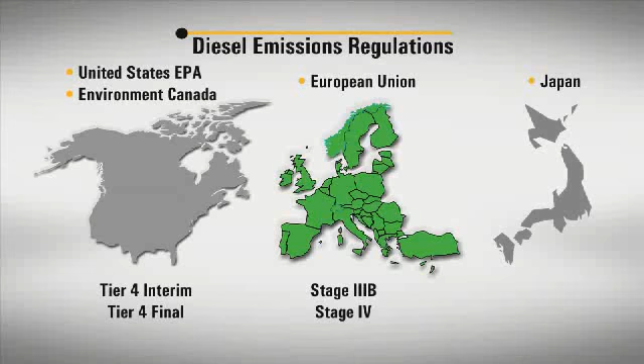Non-road diesel-powered heavy equipment must meet new emissions regulations being phased in beginning in 2011. These regulations are referred to as Tier 4 Interim in the US and Canada, Stage 3B in the European Union, and Step 4 in Japan.

Caterpillar developed ACERT technology to meet current and future emissions regulations. ACERT improves combustion efficiency and reduces emissions. Aftertreatment, first used with on-highway trucks, was added specifically to help meet these emissions regulations for non-road machines.

One of the key emissions being removed using aftertreatment is particulate matter. The 2 primary particulates are soot and ash. Soot is made up of unburned diesel fuel and engine oil. Ash is residue from a variety of engine oil additives that didn't burn.

Periodically, the soot must be removed using a process called regeneration. Machines using the CAT C7.1 ACERT to C18 ACERT engines have a serviceable canister containing 2 aftertreatment devices, a diesel oxidation catalyst, or DOC, and a diesel particulate filter, or DPF.

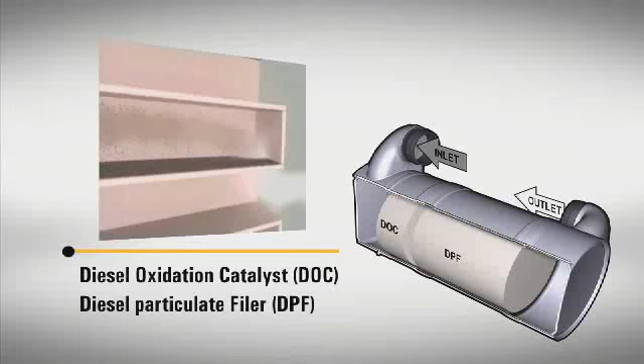As exhaust streams through the canister, the diesel particulate filter fills with soot deposits and needs periodic regeneration to remove the soot and maintain filtering efficiency. Ash that accumulates in the filter is removed every 5,000 hours using a special service procedure that requires the filter to be removed from the canister.

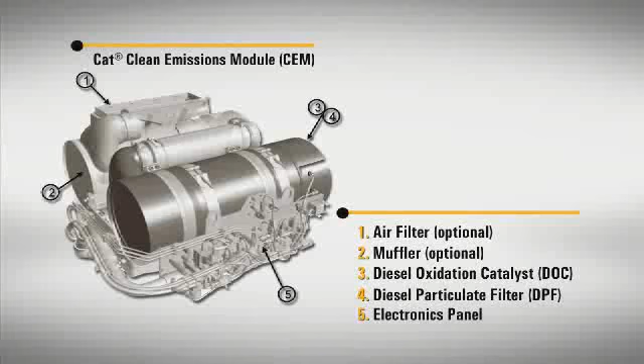The CAT Clean Emissions Module, or CEM, contains the aftertreatment canister and a combination of other components from the list shown depending on the machine model. In many machine applications, the CEM mounts directly over the engine.

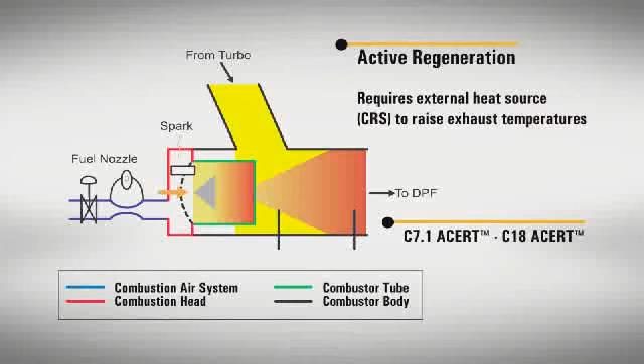Active or high-temperature regeneration, used on the CAT C7.1 ACERT to the C18 ACERT engines, requires a supplemental heat source for regeneration. The CAT Regeneration System, or CRS, fits ahead of the DPF canister on the Clean Emissions Module.

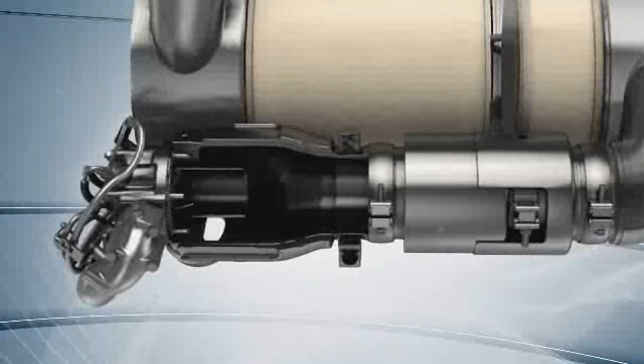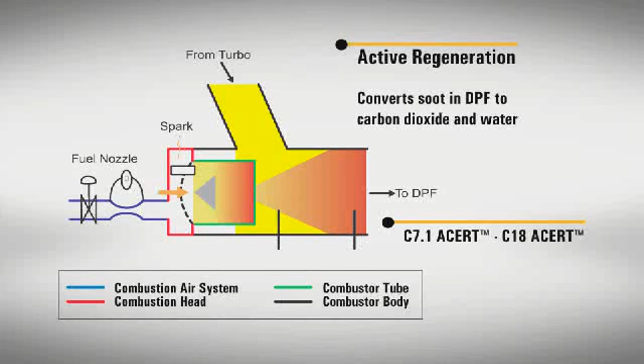This device has its own source of combustion air from the turbocharger, diesel fuel from the machine's fuel tank, and spark ignition. During regeneration, exhaust flowing through the CRS is heated, which oxidizes the soot in the diesel particulate filter and converts it into carbon dioxide and water.

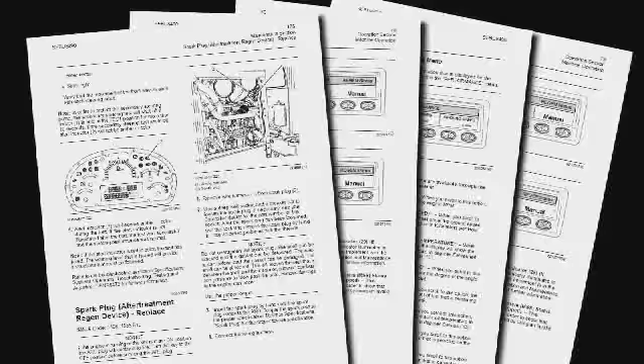While operating in automatic regen mode, there is no operator action required to initiate a regeneration cycle. Be sure to check your machine's operation and maintenance manual for the inspection points on the Clean Emissions Module. During your walk-around inspection, the various fittings, connectors, and clamps need to be inspected.

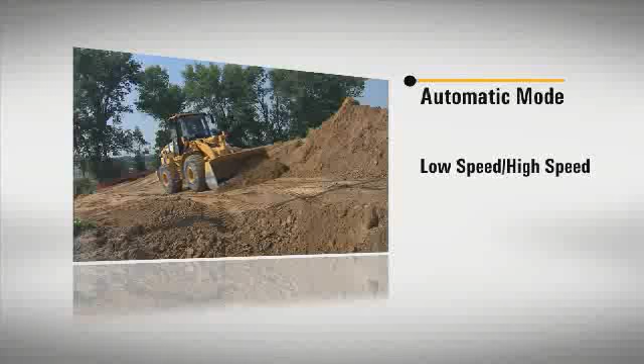There are 3 regeneration settings: automatic, manual, and disable. Automatic mode has 2 programmable options that enable the engine ECM to initiate regeneration. At the low-speed, high-speed setting, low-speed regen occurs when the soot level in the diesel particulate filter is 30% or greater and the machine meets certain conditions near low idle.

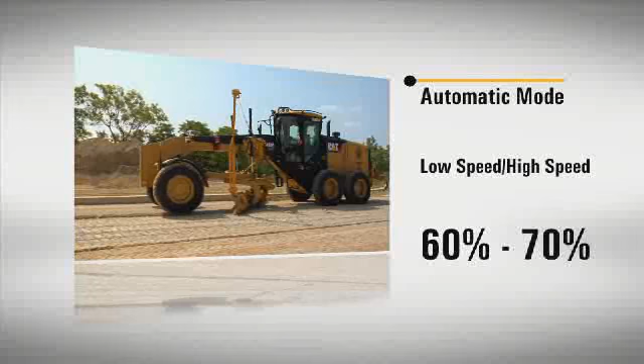Should the soot level reach 60 to 70%, high-speed regeneration occurs while the machine works. If preferred, the ECM program can be changed to low speed only to provide regeneration while at idle and disable the high-speed option. The advantage is that low-speed regen uses less fuel than high-speed regen.

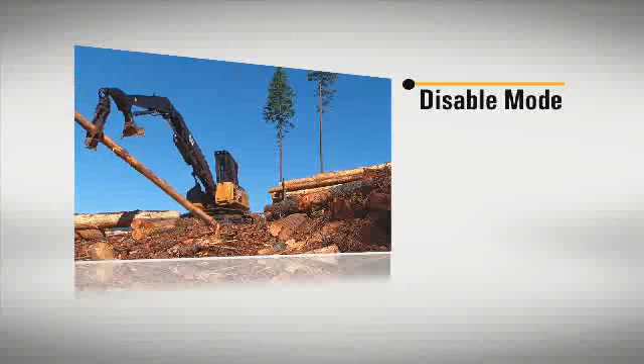Manual mode enables the operator to override auto mode and initiate regeneration using the manual regeneration switch in the cab. This can happen as early as a 15% soot level is reached. Disable mode enables the operator to prevent regeneration from occurring while working around combustible materials or airborne dangers such as gases or dust. However, soot continues to accumulate.

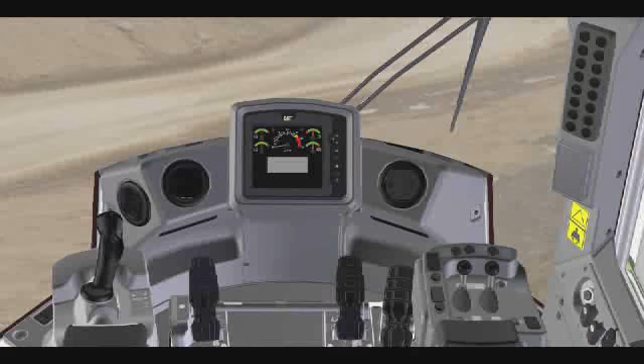Tier 4 Interim Stage 3B machine operators must be able to recognize the various regeneration alert indicators and understand the switches that have been added inside the operator's compartment. These include the soot gauge, alert indicators, action lamp, and multi-level warning system.

The soot gauge is a bar graph that slowly moves from left to right, from 0 to 100% as the DPF fills with soot. After regeneration, the soot gauge will reset to 0.

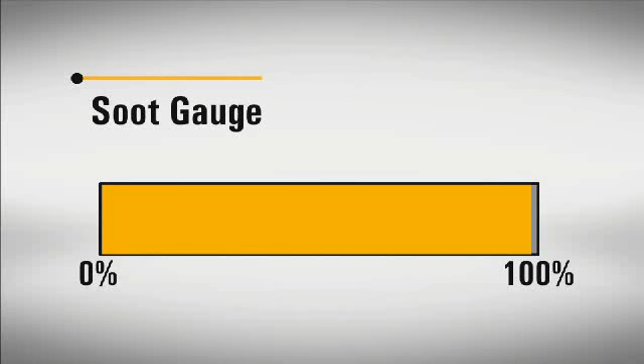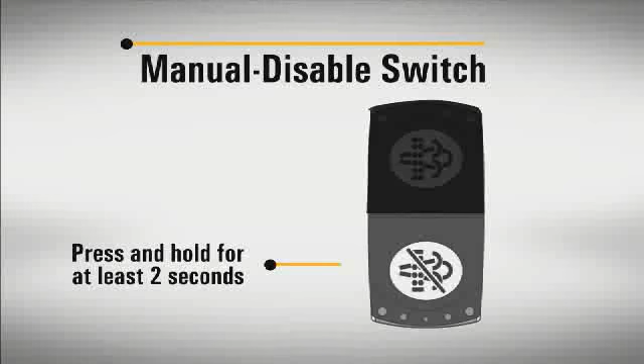The manual disable switch is located in the cab and has two different designs based on machine model. One is a spring-loaded rocker switch that controls two different features. Press and hold the top half of the switch for at least 2 seconds to manually initiate a regeneration cycle. Press and hold the bottom half of the switch for at least 2 seconds to disable regeneration. If neither function is activated, the system remains in automatic mode while the switch is in the center neutral position.

The alternate switch design separates the two functions into individual buttons that also must be depressed for 2 seconds. The disable feature is important if the machine might be temporarily working around flammable materials, gases, dust, or similar applications. In these situations, automatic mode should be disabled. Machines that constantly work in these conditions will normally have the automatic mode feature disabled in the ECM or machine software.

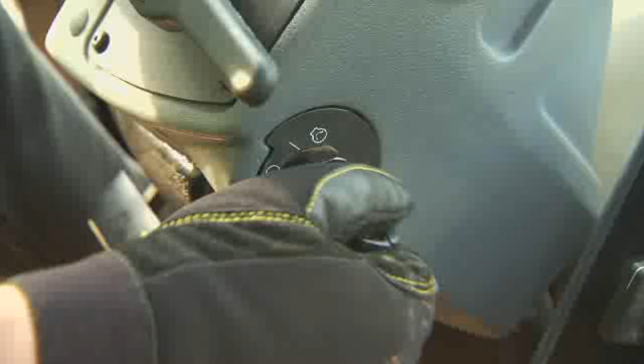Whenever a machine's key switch is turned off, the system defaults back to automatic mode. If you had regen disabled, you'll need to press the switch again when you restart the machine.

The DPF lamp illuminates when the soot level reaches 90% and above. It alerts the operator that regeneration is required.

The regeneration disable lamp illuminates any time regeneration has been disabled. Regeneration can be disabled by an operator using the manual disable switch in the cab, or by a service technician changing the engine ECM software with CAT-ET.

The regen active lamp illuminates any time regeneration is taking place. The lamp is activated as soon as regeneration begins and goes out as soon as regeneration ends. Keep in mind that when the lamp is illuminated during regeneration, the exhaust temperature is higher than normal.

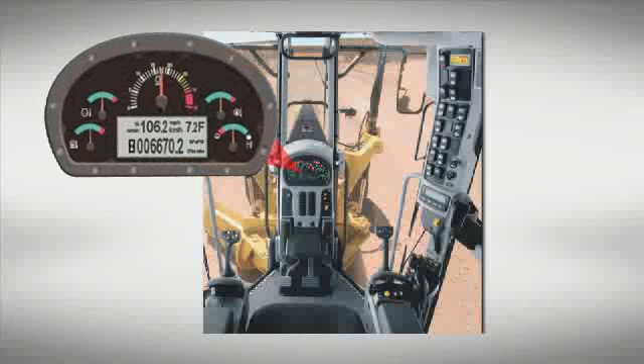This visual identifies the various components inside the cab of a CAT M-Series motor grader. The operator interface consists of the gauge cluster, the CAT messenger display with the DPF soot gauge appearing on the left and the regen status appearing on the right. The display we see shows that regen is in auto mode.

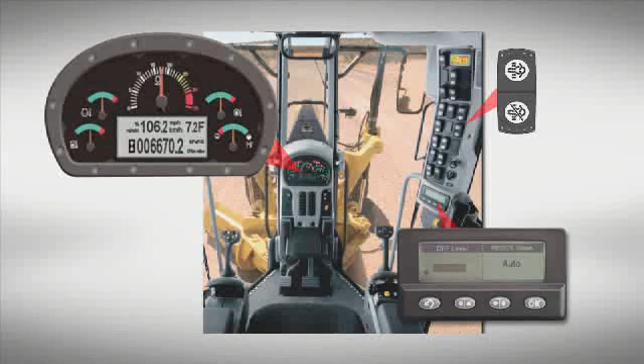The manual disable regeneration switch is found on the switch panel located on the right-hand cab post. On the front panel below the instrument cluster are the DPF lamp and regen active lamp.

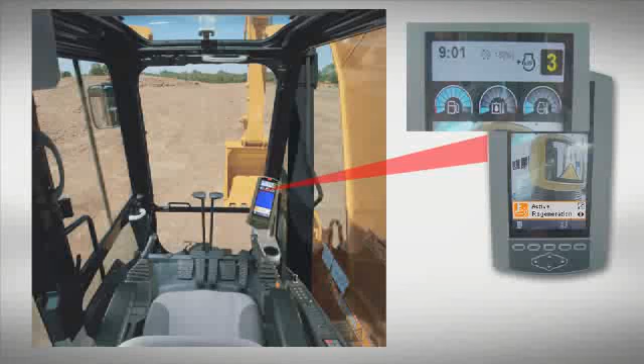The operator interface on CAT hydraulic excavators consists of the liquid crystal display that now includes the various regeneration indicators, such as the regen active lamp, regen disable lamp, and DPF lamp. The DPF soot level appears above the gauges at the top center of the display. On the hydraulic excavator, the bar graph style soot gauge is replaced by a numerical percentage from 0 to 100%.

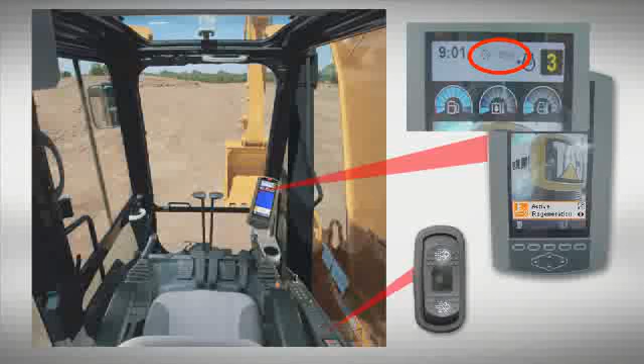The manual disable regeneration rocker switch is located on the right-hand console.

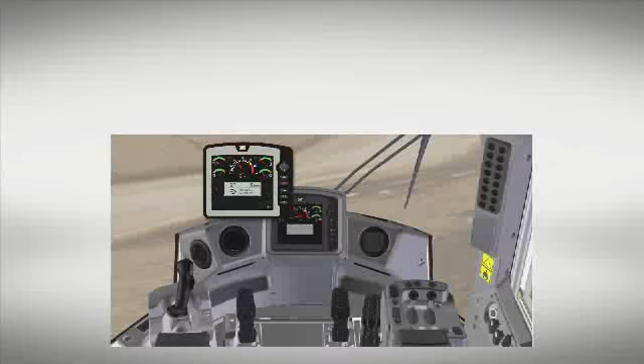The operator interface in the CAT medium wheel loader operator compartment consists of the Generation 3 instrument cluster, shown on the left. Regeneration indicator lamps are located below the gauges. Regen status can be viewed on the LCD screen. The manual regeneration and disable regeneration buttons are found on the panel located on the right-hand post.

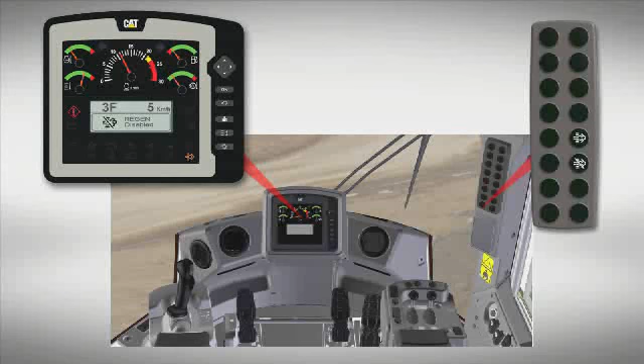In this section, we have 3 different regeneration scenarios using simulated automatic, manual, and disabled modes. All 3 are based on a wheel loader cab mock-up. We'll start by tracing the automatic regeneration sequence.

Regeneration status is first set at the factory. However, it can be changed by a Caterpillar service technician. The operator can also disable regeneration or manually initiate regeneration from the cab.

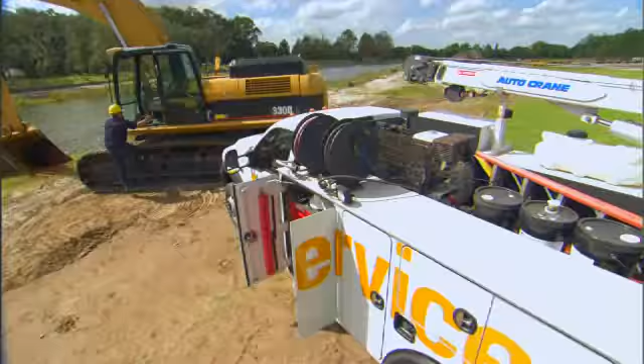While in automatic mode, the engine ECM can initiate regeneration at low speed while the machine is at idle. This occurs anytime the soot level reaches 30% or more and various idle opportunities are met, such as parking brake on, transmission in neutral, and implement down.

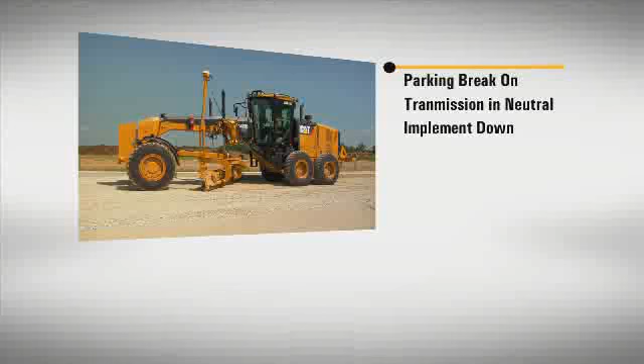When the high-speed setting is enabled, regeneration is initiated while the machine works, as soon as soot levels reach approximately 60 to 70%. The advantages of high-speed regen are that it takes less time and uses less fuel than low-speed regeneration. The maximum number of minutes required by the system for low-speed regeneration is 20 to 25 minutes to clean a full diesel particulate filter.

High-speed regeneration times will vary. In light work applications, however, some machines may not need regeneration for several shifts.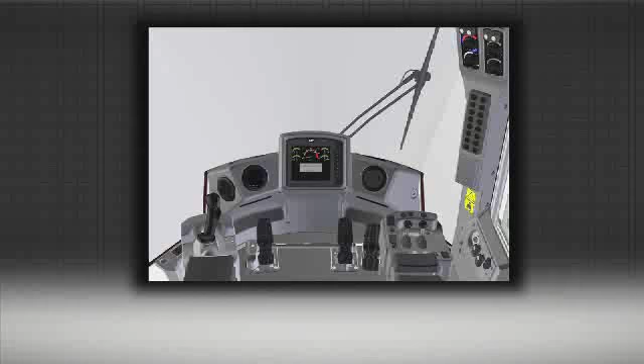This simulation demonstrates how automatic regeneration takes place. In this first screen, we see that the parking brake is engaged and the message display indicates that the regen status is programmed to automatic.

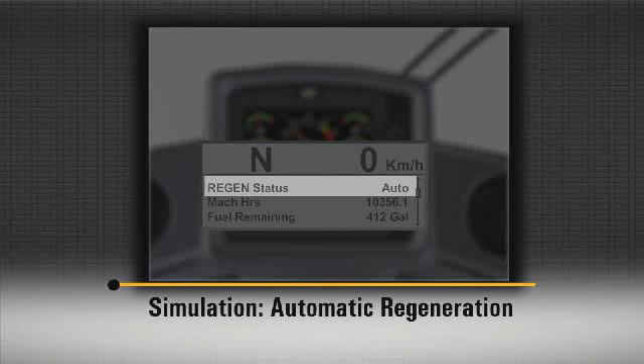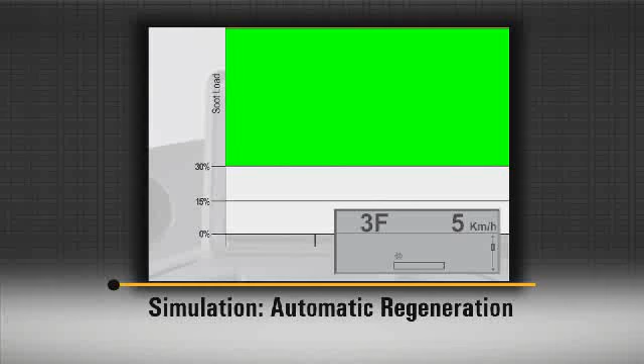Next, the parking brake is released and the RPMs increase. On the display inset, we see that the machine is now operating in third gear forward while traveling at 5 kilometers per hour. The soot gauge and the soot load on the chart track in unison as the soot captured in the DPF rises from 0% to 15%.

When the regeneration status is set to automatic, the engine ECM can command a low-speed regeneration when the DPF soot level reaches 30% or greater, when it determines that the machine is in a non-work condition. If suitable machine conditions are not met, regeneration will not occur, and the soot level will continue to rise.

When the soot level reaches approximately 60 to 70%, if high speed is enabled, the engine ECM will initiate regen while the machine works. The machine continues to work, and the soot level rises to approximately 65%.

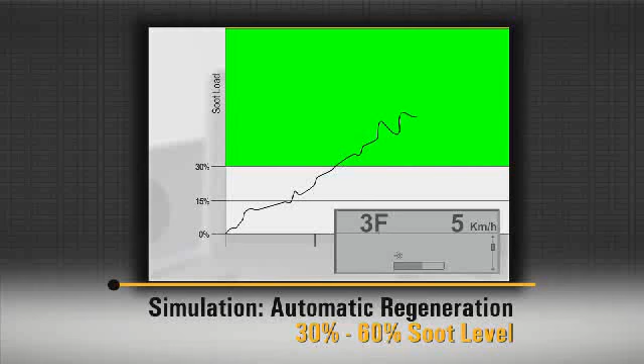The operator idles the machine, and we see the parking brake engaged. The machine is in neutral, and there is 0 ground speed. The ECM, sensing a non-work condition, commands regeneration.

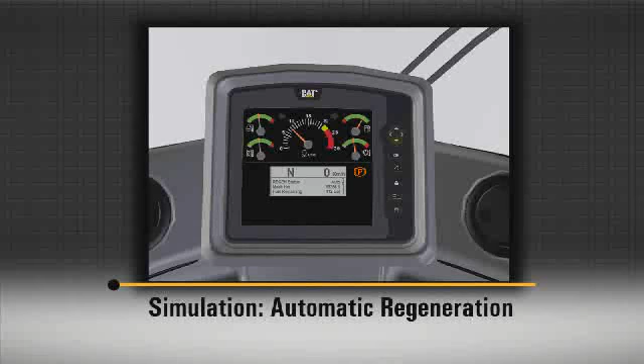Below the display, we see the regen active lamp illuminate. With the machine stopped and in neutral, regeneration continues. The regen active lamp remains on.

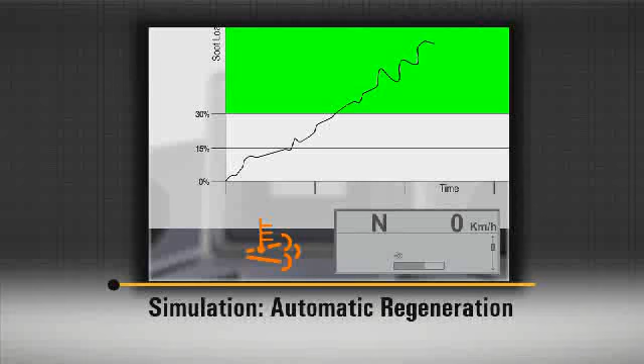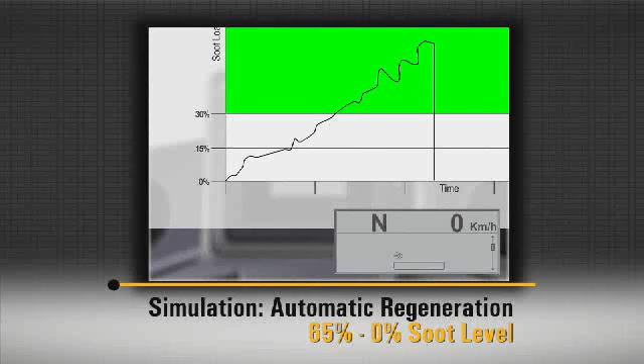The soot gauge and the chart both reset from a 65% soot load to 0% after a complete regeneration. When the regeneration cycle is completed, the regen active lamp turns off. Keep in mind that regeneration raises the temperature of the clean emissions module near the engine.

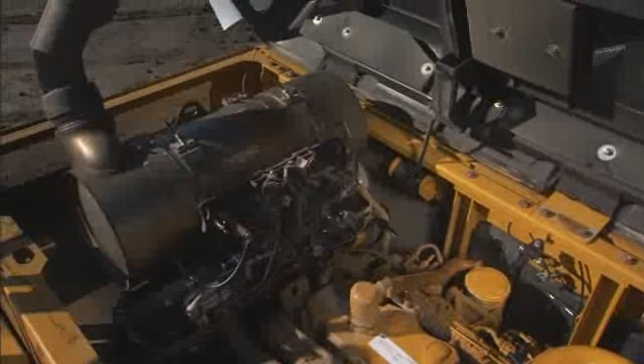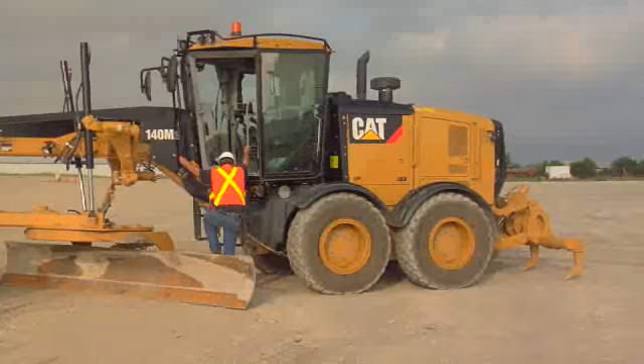If you break for lunch and the ECM initiates regeneration, be careful when you return to work and do your walk-around inspection. When checking fluid levels, there are components in the engine compartment that may still be hot. Also, when regenerating while on break, someone must always stay within 25 feet of a running machine to meet U.S. OSHA worksite regulations.

This simulation demonstrates how manual regeneration occurs. If the machine is set to manual regen, the soot continues to accumulate in the DPF. It's important that the operator monitor the soot gauge and indicator lights. At 30%, the operator has the opportunity to manually command a regeneration, if desired, using the manual regeneration switch in the cab.

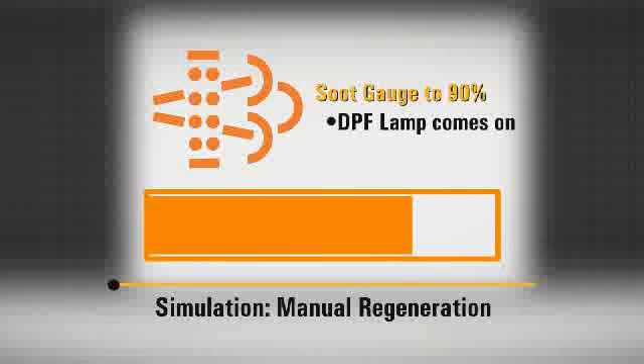We will now discuss what happens when regen doesn't take place and the soot level increases to 90%. At 90%, the DPF lamp illuminates on the dash to inform the operator that it is time for regeneration at the next available opportunity. In this simulation, the regeneration status is set to manual, the parking brake is off, and the machine is once again working.

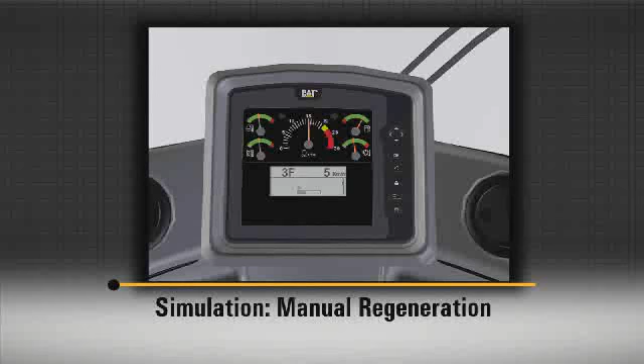In our last simulation, we saw regeneration take place at 65%. In manual mode, the DPF will continue to accumulate soot until the operator presses the manual regeneration switch in the cab. Here, we see that the DPF lamp has illuminated. Again, this tells the operator to regenerate at the next possible opportunity. The operator continues to work.

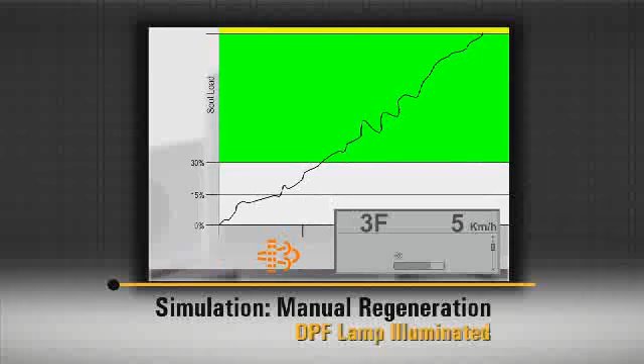The soot continues to increase in the diesel particulate filter, and before it reaches 100%, the operator determines that it is time to regenerate. The operator takes a break and places the machine into a non-work mode. The engine is at idle, the transmission is set to neutral, and the parking brake is engaged. The operator presses the manual regeneration button and holds it for at least 2 seconds.

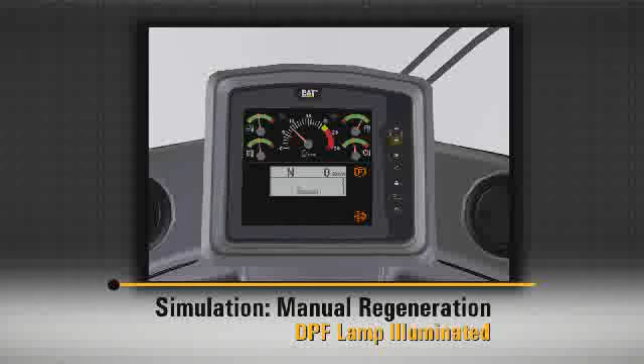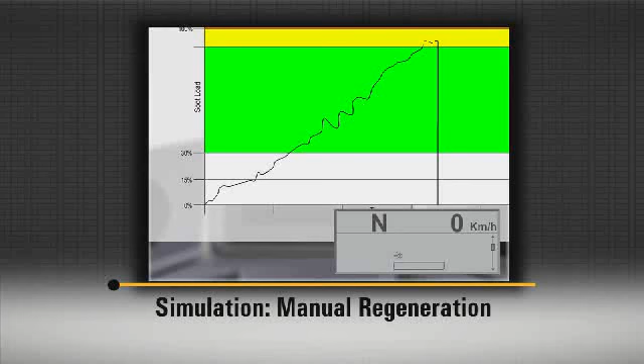When the regeneration cycle begins, the regen active lamp illuminates. The soot level in the DPF eventually returns to 0% after a full regeneration has taken place. Regen can be interrupted at any time if the machine returns to work.

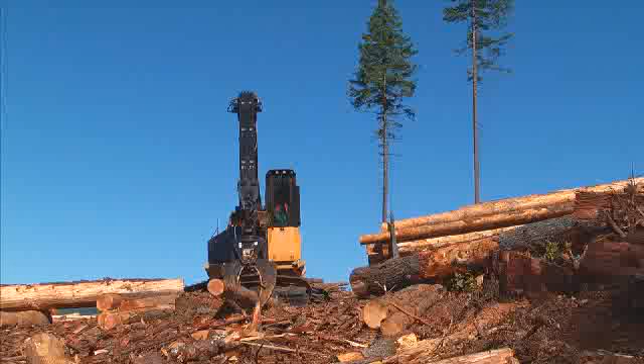Why would we disable regeneration? We disable it if we're working in an application where there is flammable debris such as wood chips or dry forest conditions, or if there are gases, dust, or other risks that we need to avoid. So we disable regen, and when the machine is in a safe stationary setting, we manually initiate a regen cycle.

Similar to manual mode, with regen disabled, the soot continues to accumulate in the diesel particulate filter until we initiate regeneration. As operators, we have to pay attention to our warning signs. Whenever the soot gauge reaches 100%, the red action lamp begins flashing continuously, telling the operator to regenerate immediately.

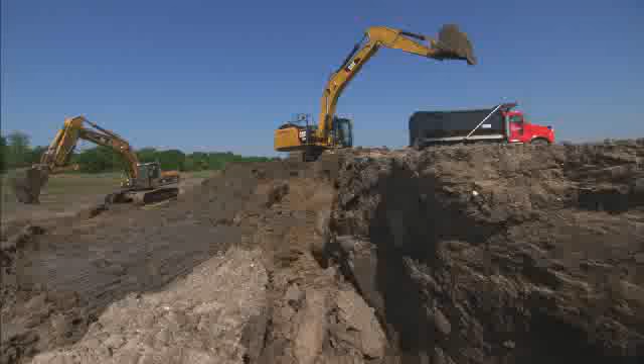There are several possible explanations for a DPF having a soot load of 100% or more. The most common reasons are that the operator didn't create a sufficient non-work window to allow low-speed regeneration to occur automatically, was working the machine too hard to permit high-speed regen to occur, or didn't initiate regeneration while in manual mode. Another possibility is that regeneration has been disabled by a service technician or operator.

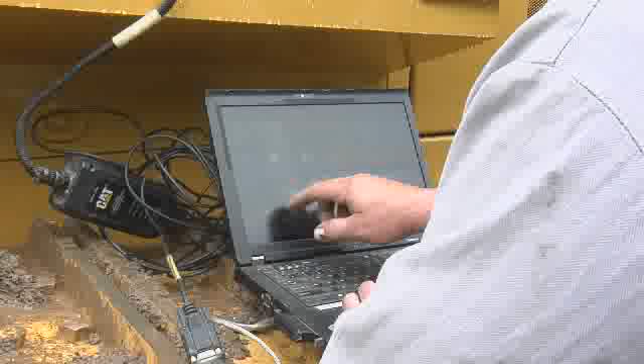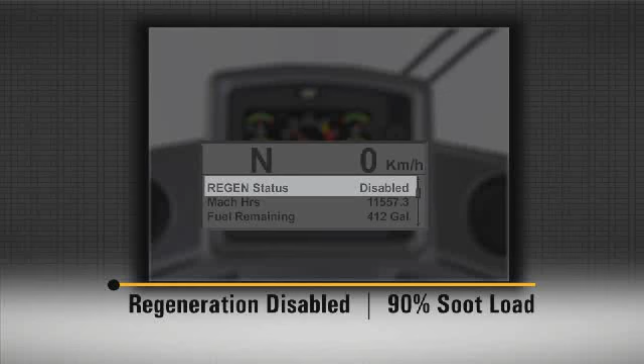Our last simulation demonstrates what can happen when regen is disabled. When regeneration has been disabled by either a CAT service technician or by the operator using the disable switch in the cab, soot continues to accumulate in the DPF. Once again, we are in third speed forward, traveling at 5 kilometers per hour.

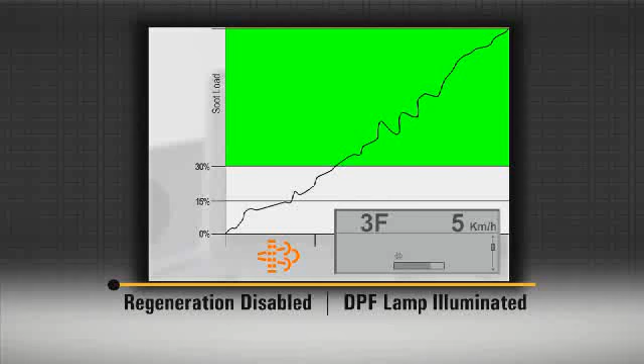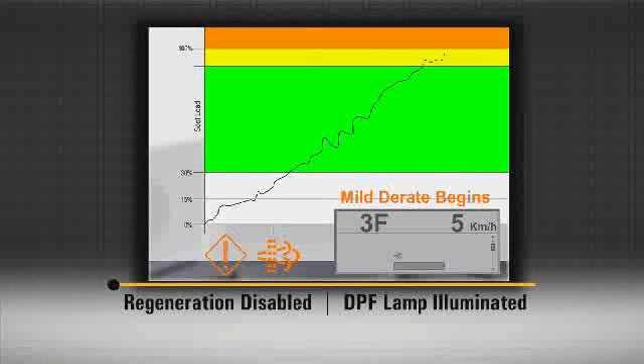Here, the DPF lamp has illuminated just like it did in our manual example. In disable mode, the various warning indicators continue to be prompted as they would if the regeneration status was set to automatic or manual. Look at our soot gauge. When the bar is completely filled to the far right, it's at 100% soot level.

At 100%, the action lamp begins to flash continuously. The engine also begins a mild derate. The useful range of the DPF is from 0% to 100%. However, with the soot gauge at its maximum level, the soot level does go higher, and the warnings become more aggressive.

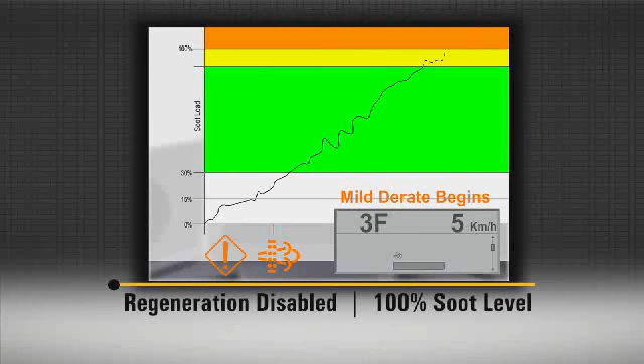When the soot level in the diesel particulate filter reaches 116%, the audible alarm sounds in the cab. The DPF lamp remains on, and the action lamp continues to flash.

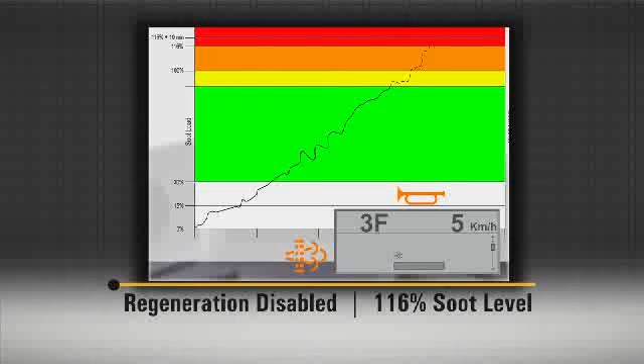The engine derate progressively increases as the percentage of soot increases in the DPF. If you continue to operate the machine for another 5 minutes after reaching the 116% soot level, the engine ECM forces the engine to idle down. The warning lamps and audible alarm continue. The operator can turn the key off and restart the engine to clear the idle down limitation.

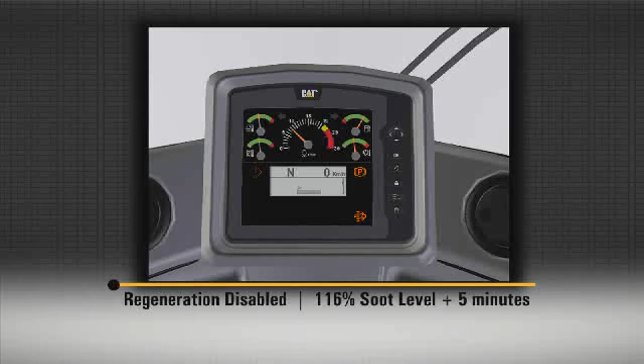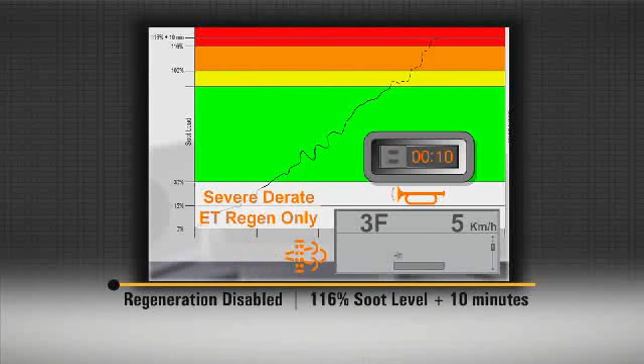At this advanced stage of soot accumulation in the diesel particulate filter, the operator should regenerate the DPF immediately. Should the operator continue to ignore the warnings and permit the soot level to reach 116% plus 10 minutes, a severe engine derate begins. The audible alarm and warning lamps continue. Most important, when this 116% soot level and 10 additional minutes of operation have been reached, the machine goes into lockout mode. The operator is no longer able to initiate a manual regeneration or allow the engine ECM to initiate an automatic regeneration.

Once the machine reaches lockout mode at 10 minutes of operation after reaching 116% soot level, a service technician must be called to perform regeneration using the CAT Electronic Technician Service Tool. We're talking loss of production plus a service call, which is added cost and time. An operator should never let a machine get to this condition. But, as you will see shortly, it really can get worse.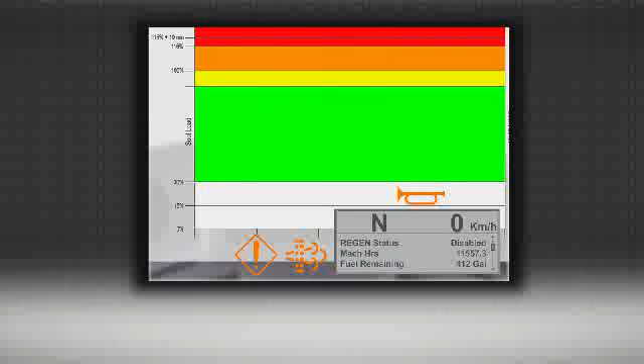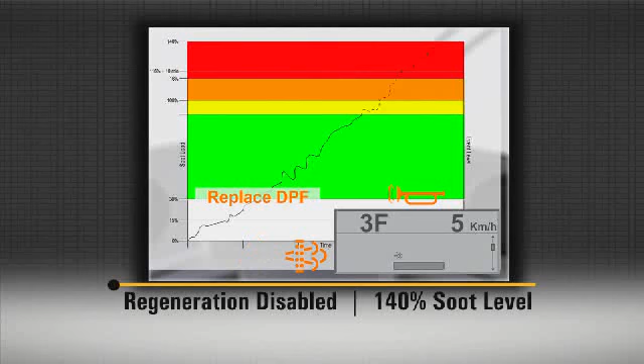Total soot saturation of the diesel particulate filter occurs at 140%. At this stage, the diesel particulate filter can no longer be regenerated and must be replaced. Performance is also greatly curtailed, and it may take extra effort just to move the machine to a suitable spot for servicing. At 140%, the engine ECM will first force the engine to operate at low idle, followed by immediately commanding the engine to shut down.

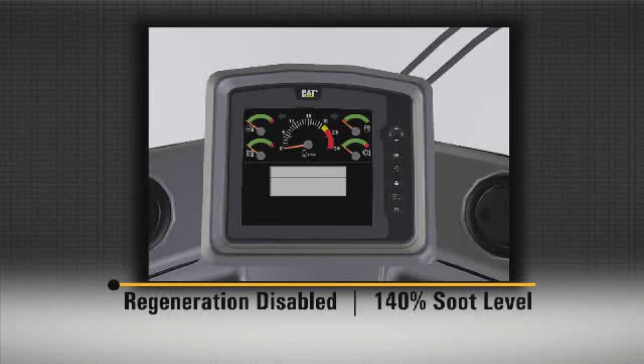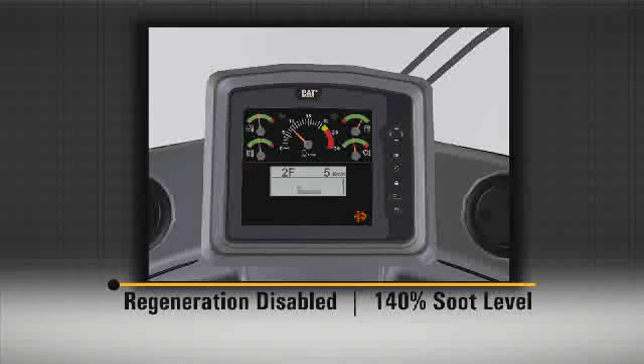The operator can restart the engine and run the machine for an additional 30 seconds at a time to reach a suitable area to safely park the machine. You can use this key-off, key-on restart method indefinitely, but you only get 30 seconds of runtime with each restart, and the engine speed is limited to the low idle setting. Basically, the system lets you limp the machine to a safe state. After each 30-second runtime, the machine shuts down and must be restarted with the key.

Delayed engine shutdown is a cool-down sequence that idles the engine for 5 minutes to protect components inside the engine compartment. This feature should only be disabled in emergencies when immediate engine shutdown is required. When enabled, the delayed shutdown sequence will occur automatically at key off, and an icon, shown here, will illuminate on the instrument panel. The 4-position key start switch was developed to provide an emergency stop feature that disables the delayed engine shutdown feature.

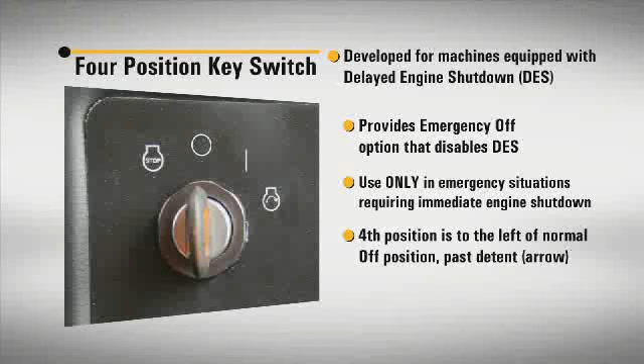It is intended for emergency use only. To initiate an emergency shutdown, the operator moves the key counterclockwise from the on position past the detent at the off position to the new emergency off position at the far left. This 4th position is spring-loaded, requiring the operator to hold the key in the emergency off position until the engine has fully shut down. Releasing the key returns it to the standard off position where it can be removed from the switch.

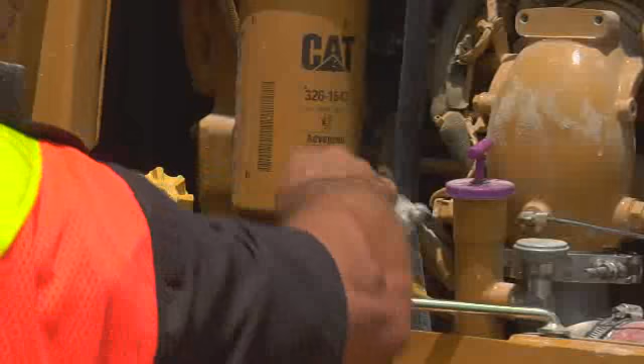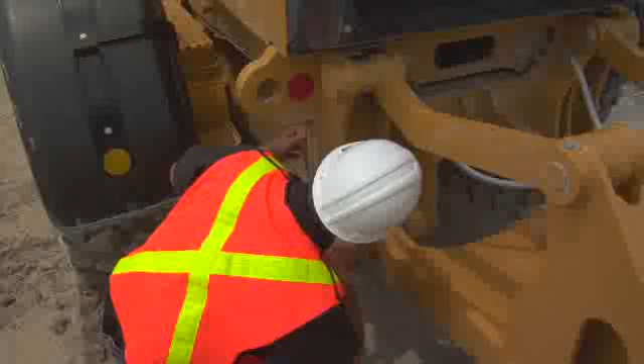On Tier 4 motor graders and articulated trucks, an electric fan with the delayed shutdown feature is used to reduce heat in the engine compartment instead of delayed engine shutdown. These machines continue to use a 3-position switch. When leaving a motor grader or articulated truck, the battery disconnect switch should not be turned off until the fan has run its cool-down cycle.

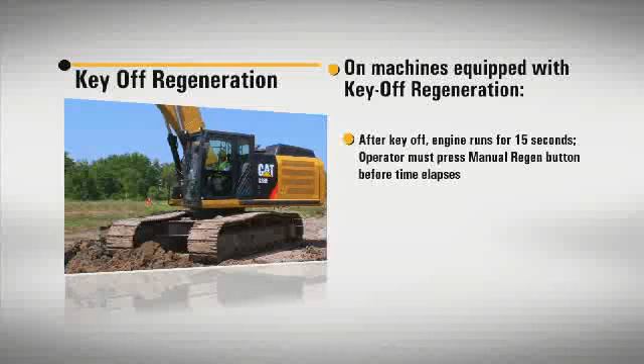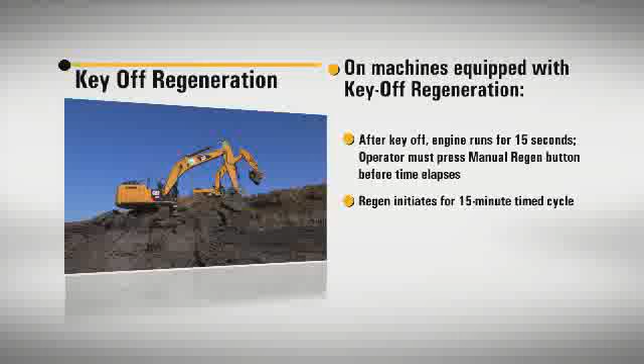Machines that offer the delayed engine shutdown feature may also offer key-off regeneration. To utilize the key-off regen function, the machine must be in either automatic or manual regen before the key switch is turned off. If the machine is in auto regen before the key is turned off, the engine will continue to run for 15 seconds. The operator must press the manual regen button within the 15-second window to enable the machine to perform a key-off regen cycle. After regen is complete, the delayed engine shutdown timer will begin counting down from 5 minutes to cool the engine compartment and protect the electronics.

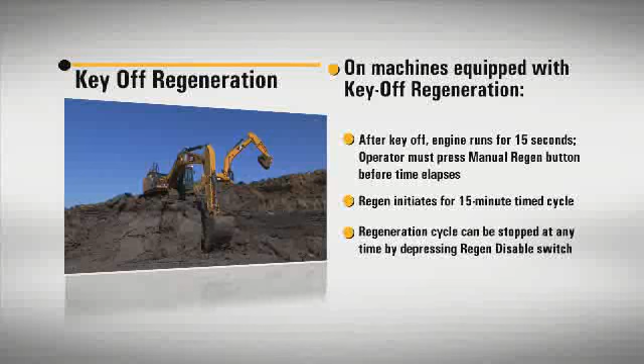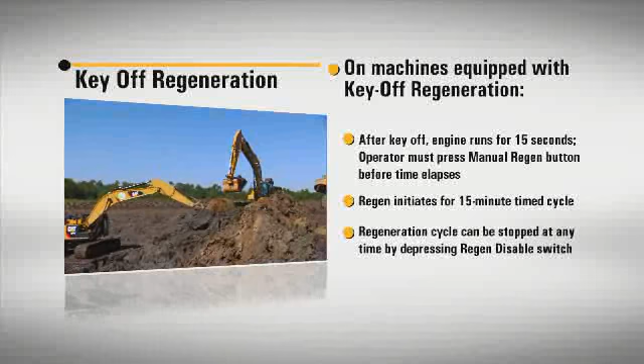Be sure to check for any rules or regulations that apply to your work site regarding unattended machines. Someone may need to be assigned to monitor machines as they regenerate. To meet U.S. OSHA worksite regulations, for example, someone must always stay within 25 feet of a running machine.

The information contained in this presentation is current as of August 2010. Operators should always check their operation and maintenance manual for detailed guidelines about Tier 4 features on their machines. For further and up-to-date information about Tier 4, refer to the CAT Operator Training website, www.cat.com/training.